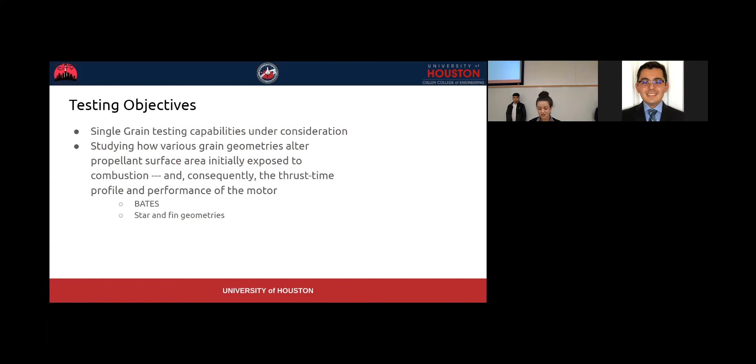A bit more about our testing objectives: we're thinking of testing single grain, though dual grain has been considered as well. Another objective is to test how different grain geometries might alter the thrust curve, looking at that thrust-time profile. Among the geometries we're considering are the BATES geometry, as well as playing around with different star or multi-fin geometries.

Our first group was materials, and the candidate materials we looked at included aluminum and two aluminum alloys, as well as stainless steel. We do have titanium on there as part of our decision matrix, just for the sake of completion and as a relative marker for how aluminum and stainless steel measure up. In the decision matrix on the next slide, titanium is there not as a true contender, but as a relative check.

As far as configuration went, we considered the two types of vertical - thrust pointing up or down - as well as horizontal. We think doing it vertical with thrust pointing down would be the safest and makes the most sense, mainly because if something were to go wrong, we mitigate the risk of projectile shards, and it would implant the motor into the ground if the structure were to fail. This configuration does have some drawbacks, mainly that it's an inaccurate representation of flight because gravity and thrust are going in the same direction.

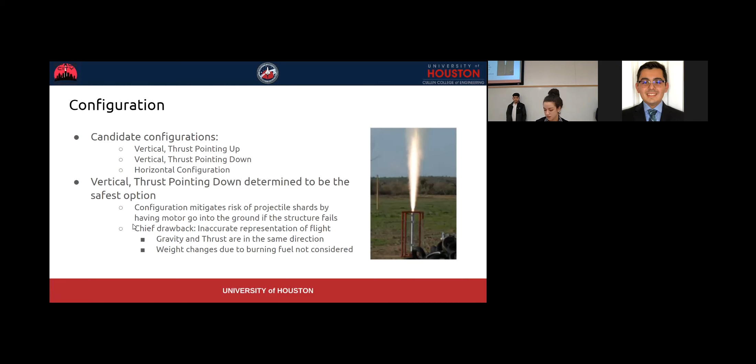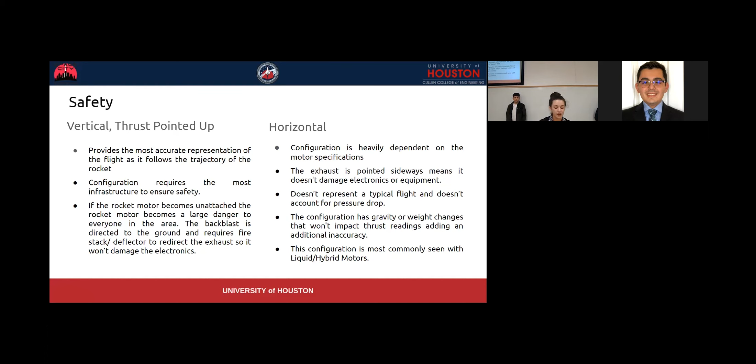Even though we think vertical thrust pointing down is better, here's a brief summary of the other two options. For horizontal, it's most commonly seen when we have liquid or hybrid motors. Since we're testing solid propellant here, we don't think it would be the best option. As far as vertical thrust pointed up, it would be the most accurate representation of flight, but the safety considerations are the trickiest, and we thought we could get rid of that by choosing vertical thrust pointed down.

As far as electronics, for the load cell we will be using the one we currently have in the lab, which is our 500-pound S-beam load cell. This works for two reasons: for up to K class motors, that should be enough, and budget-wise it's good to use equipment we already have.

These are different parts of the electronics as shown on the wiring diagram right here. This is also one we have left over from the capstone testing, rolling over to this one. Some things we're looking to change include that the old one uses an Arduino Mega, and we might be swapping that out for a Teensy.

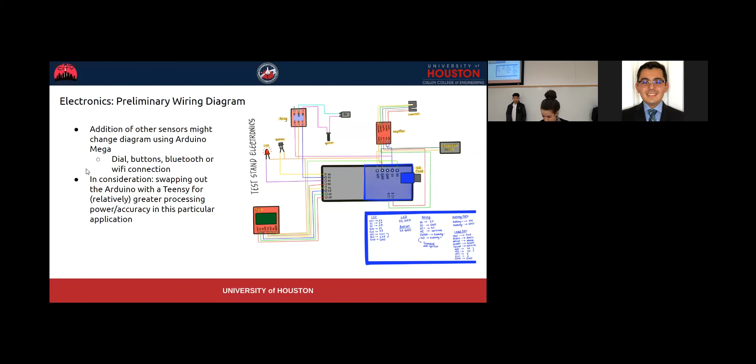As far as the electronic housing unit, we were thinking of having a single unit with all the electronics and wiring included, mounting it onto one of the rail frames. This is also up in the air right now - we're thinking of having it somewhere along the lower rail frame, but position has not been finalized. We were thinking of having something with different slots for wires that we can take apart and put back together relatively quickly.

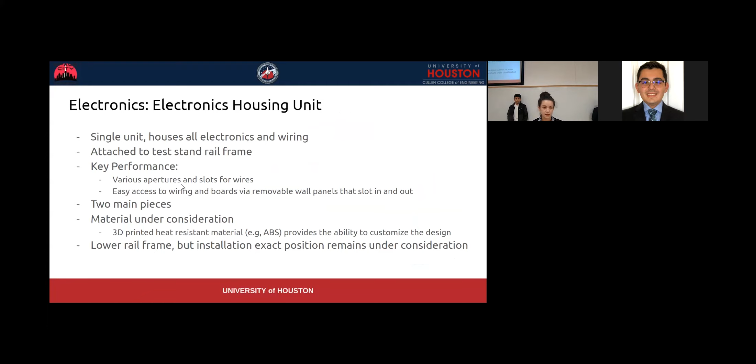And that was it for the solid propellant test. Avionics is split up for SRAD primarily into 4 different sections - you'll see these as we go through the slides. Our 4 different areas of focus would be a flight computer, a ground station, an SRAD sensors team to focus on what kind of sensors might be useful to further develop the rocket, as well as a telemetry team.

Here's a brief overview of the SRAD sensors. Basically, the idea is we'll be applying sensors throughout the rocket to determine areas to collect real-world data from that might allow us to further develop our rockets. A few examples will come up as we go through here, but ultimately the goal with this team is to further the development of rockets by having real-world data we've collected to determine our materials and strength of things as we move forward.

So one of the sensors we talked about was a thermal gradient sensor for the propulsion system. You can see on the right there's a bit of math that has been looked into for the thermal gradient. One of the first things we had to look at was thermocouples versus thermistors.

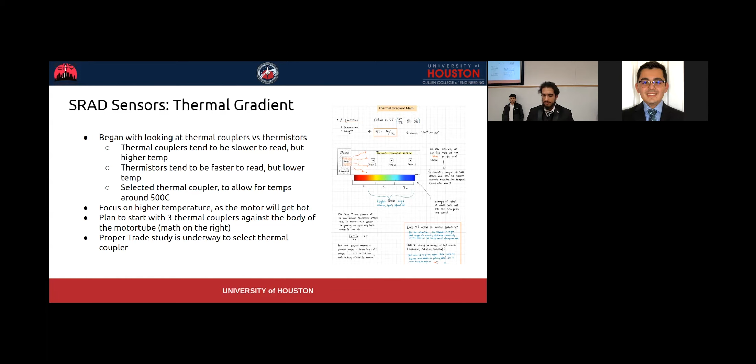We're going to have a trade study done a little bit after the PDR. We want to make sure we have enough time to properly look through all our options and decide what would make the most sense as far as thermocouples go. So it's something that had to be pushed beyond the PDR.

One of the other ones we talked about for structures would be strain gauges. We want to have strain gauges on the fins to read the real world forces that happen on the fins during launch. Some of the major things we want to do: we want to try for 2 per fin, which will be costly. For now, we want to stick to 1 per fin, but the ultimate goal would be 2 per fin. And we want to have them read in 2 directions, which is really important.

So we want to have both the downward force, so we can see how the actual forces pushing down on the rocket are as we launch, the drag forces, as well as how much the fins are flexing during flight, if there's any flex whatsoever. That'll give us some real world data we can work with and hopefully pass off to the analysis team to do more with.

Again with this, we have a trade study underway. Our criteria has been highlighted under vibration durability, high accuracy, force safety factor, and cost. We had bought some strain gauges before off Amazon, and they were very cheap and did not work out very well. This criteria was determined based off of that. Hopefully these will be a little bit better.

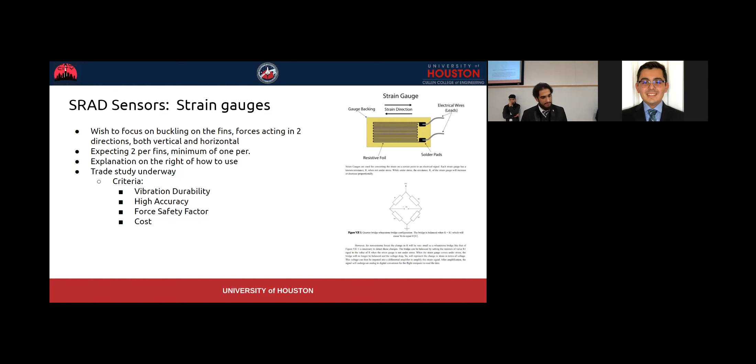You can see a picture of strain gauges on the right, as well as some information we have about them. So next we have the flight computers.

Some of the objectives we had for our flight computer: we want to measure atmospheric pressure, measure acceleration, and be able to trigger parachute deployments. This is a little bit tentative for SRAD. When we start off, we're not going to be able to trigger parachute deployments right off the bat. So it will be a long-term goal once we have a lot of testing done to ensure we're actually able to read and properly denote our states, which is very important.

Obtain gyroscopic readings, GPS tracking, log flight data onto an SD card, and transmit real-time data to the ground station, as well as receive commands from the ground station. We'll talk about all these a little bit more.

For the flight computer, predominantly for our main controller, we want to use the Teensy 4.1. The 4.1 is optimized for I/O. Out of all the Teensies, the architecture changes as the numbers go up, and the 4 architecture is really designed around being able to read information in and out really quickly. It's also coupled with quite a few I/O pins, so we found it to be the best for us.

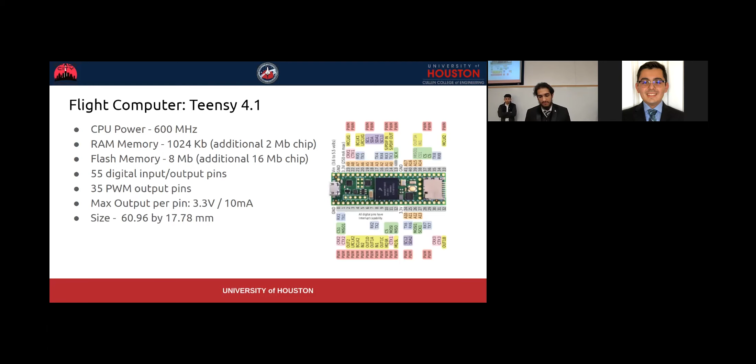For our barometer, we have a BMP390. This was last year. We had a list of options that we were able to use for our barometers that was given to us by our chief engineer. And we conducted a trade study, and we believe this one to be the best option, so that's how we came to this one.

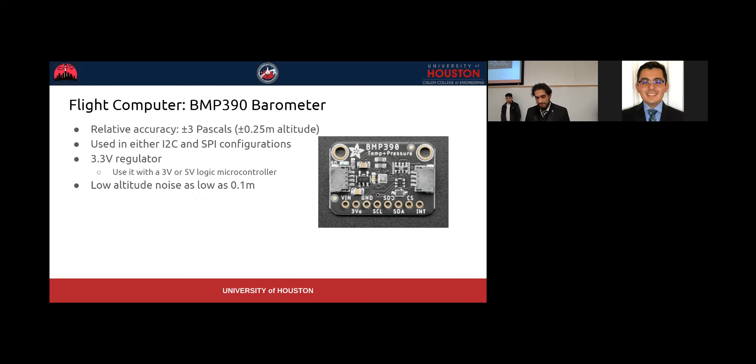Relative accuracy of about 3 pascals. We originally wanted to use I2C communication, but it's seeming like that might be a little bit too slow, so we're considering moving over to SPI. It's a built-in 3.3 volt regulator, and there's low altitude noise.

Then we have our accelerometer gyroscope, which is the LSM6DSO32, which is a whole mouthful.

You can see it's a fairly low power consumption, which is something that's really important to us, as we'll be running off a 9-volt battery. We want to make sure that we have optimal time, potentially 3.3 volt, 3.7 volt that we've been looking at.

This one also uses either SPI or I2C. It has an analog voltage supply of around 1.7 volts to 3.6 volts. It's able to read fairly well in our kind of tilts for acceleration, for gyroscopic data. Maximum acceleration works to about 34 gravities, and the standard data sampling rate is from 1.6 hertz to 6.7 kilohertz.

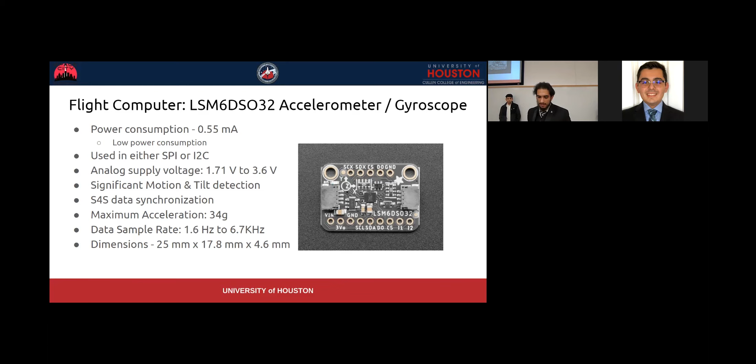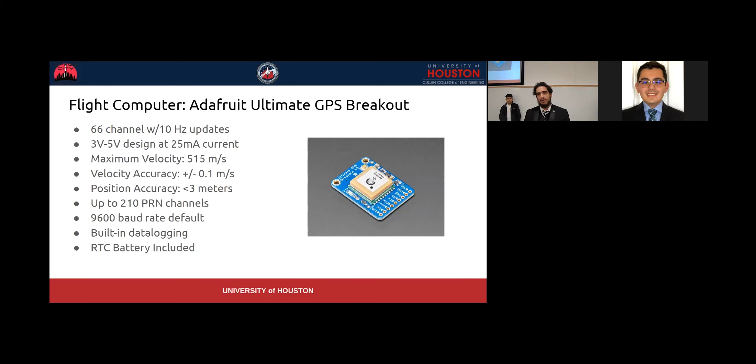Dimensions are there. So then we have the GPS breakout board. This one is going to be important for us to be able to get the last known location of the rocket, obviously. And this will just kind of give us a live read so we can find our rocket a lot easier when it's on the ground. You can see some information about it there.

We have the XBee here, which is kind of a little bit under our telemetry, but it will also go on the flight computer. You'll notice that all these parts are kind of all linked together to each other, so they kind of have some overlap.

So the XBee is our way of communicating via ham radio back over to the ground station that we will be hoping to develop this year. And that'll just kind of allow us to get some live read of the information and be able to control the rocket, do ground testing, things like that, just to ensure that everything is working correctly.

You can see there's receiving and transmitting on there, power draws. And you can see range is up to about 9 miles with a dipole antenna and 28 miles with a Yagi antenna. The frequency ranges are listed on there.

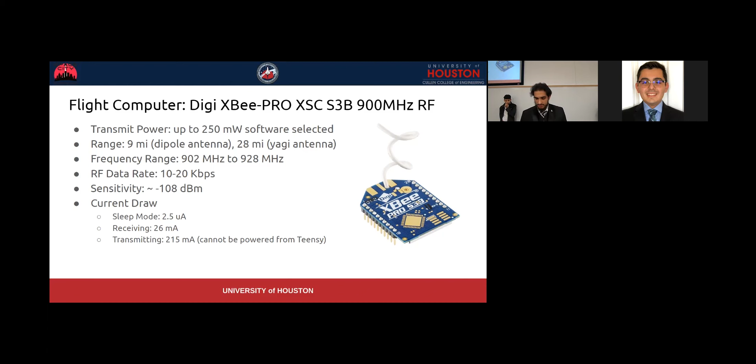So next we have the ground station. The ground station will allow us to view our information live as we're actually launching. The most useful information that we're hoping to get on here is the maximum altitude of our rocket. That way we can know what our apogee was very easily, as well as the last known location of the rocket.

Obviously, currently we have a COTS ground station that involves us carrying a laptop and a big antenna out in the middle of a field. And ideally, this station will be a lot slimmer and a lot smaller, so that way we don't have to carry out a laptop and this huge antenna, but instead this little small box in which it's all built into.

And we'll have a nice, easy to read screen because LCDs can be kind of hard to see in the sunlight. But a little bit more about that.

Here's the connection types trade study. So we talked about how we're going to hook up the XBee to which device that we want to use. So our options were we can hook it up to a Teensy, which is like a souped up Arduino for those of you who are unfamiliar.

We could do the XBee to a Raspberry Pi. And we could also do an XBee to a Teensy to a Pi. And ultimately, we found that an XBee to a Pi would be our best option because the Pi allows us to have the most expandability.

XBee to a Teensy to a Pi would allow us to reuse that code that we're using for the XBee to send data almost exactly to receive, but then processing it again in a Pi seemed like a little bit of an extra step. And the Teensy by itself, XBee to Teensy, is functionally cool, but ultimately we don't get as much power as we would with the Raspberry Pi. So we felt that that was not the option that we wanted to go with.

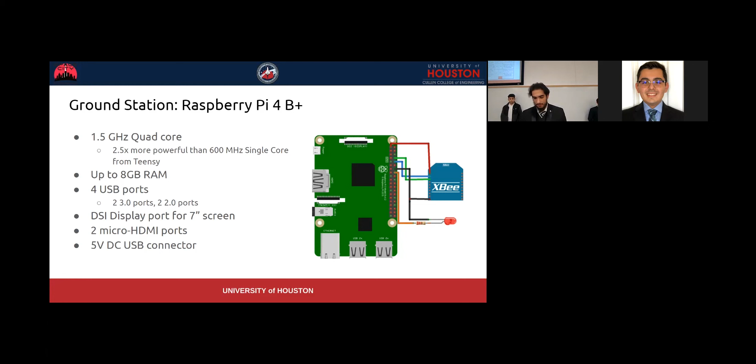Here's an OLED trade study. If you guys recall, I mentioned I wanted to have an OLED screen, so it's nice and easy to read in sunlight. Reading off a laptop or looking at your phone is functionally very hard and not very practical. OLEDs tend to be a lot easier to see in sunlight, and especially we want to go with the black and white OLED, so the contrast is really high, making it easy. This will allow us to much more easily get our data and find the location.

And plug in things into our phone, GPS coordinates and whatnot that we might need. You can see here we started with 3 different options from Adafruit, and we ended up liking the 128 by 64 OLED that was built for the Raspberry Pi. Ideally all of these would work on the Raspberry Pi, so we looked at them afterwards, but it seems to be the one in the middle there that I like the most.

So here's actually that OLED screen that we talked about. It's Raspberry Pi supported. Here's the dimensions, the weights. It has the joystick on the sides, which is going to be pretty cool. We're hoping that we can use that to switch between altitude and GPS location, and potentially other information should we add to the ground station later on.

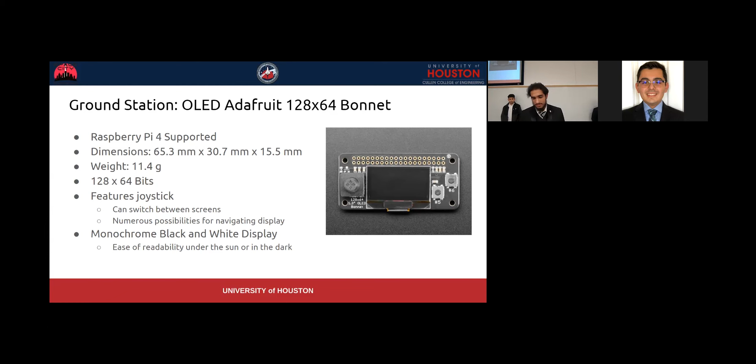It just gives us a nice way to hit the little arrow to move to the side and see a different screen, or scroll over if we need to see more for our coordinates, if we're getting more coordinates that we can put on the screen. And obviously monochrome black and white was an important thing. First of all, that brings down the price, as well as makes it easier to read in the sunlight, which are two things we wanted to make sure we had high focus on.

Here's an optional features trade study. At the beginning of the year, we had a talk with all of avionics, and I said, here's what we want to do this year. Is there any features you guys would like to add in that I've potentially not thought about? I kept it kind of to the 'this we need functionally to be a ground station' - we have to have a working way of having data sent back to us or reading it off the flight computer. These are some features that they wanted to add in, not necessarily required, but they thought would be a really cool thing to have.

You can see a 7-inch portable screen. They wanted to add a 3D render of the rocket. Obviously this is not a priority of ours, but this is something we want to add in on there, so that from our gyroscopic data we can create a 3D render locally, so you can see how the rocket is oriented in 3D space, as well as LED colors to showcase expected release.

If you guys recall, for the flight computer, we can't actually hook it up to any form of black powder or anything like that, because until we've gotten a lot of testing under our belt, we don't know that there's some random edge case we cannot account for. So these lights would denote for us when the flight computer believes it's reached apogee - it can send over a code to the ground station to turn on an LED. That way we can indicate where we expected apogee to be, as well as where we expected main to be, and compare that to our actual data collected on working flight computers we know will functionally work, to test for random edge cases we may not have considered before.

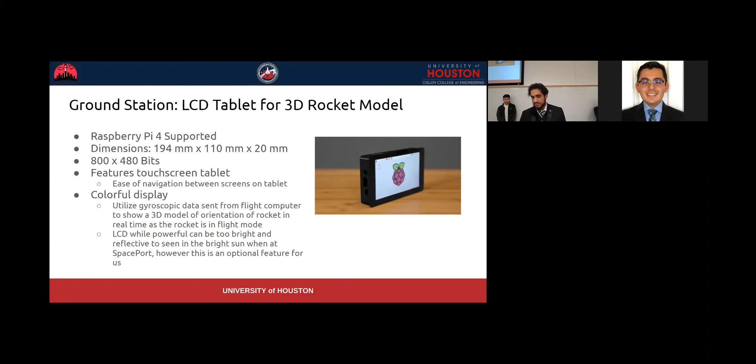It is LCD. We don't have too big of a priority on too much visibility here. It would be cool again, and it's one of those that you kind of expect not to be walking around in the middle of a field in New Mexico while actively looking at this. It would be during the launch time, so you'd actually have a little more visibility versus an OLED screen you'd be actively looking at while walking around the field. So I'd expect a little bit harder visibility there.

Here are some of the LED pins that we talked about earlier. So we were looking at 3.5 millimeter LEDs. Those are your standard LEDs that you get with almost any beginner electronics kit. Obviously through hole, no SMD.

It'll showcase 6 different states of the rocket, which you can see on there. So we have boost, fast, coast, drogue, main, and landed. I believe we're actually missing a pad - we actually talked about that earlier. We don't want to do pad just because we don't really need a denoted state for that, that should be kind of inherent.

So boost, fast, coast, drogue, and main, landed all came from our COTS system. Boost is obviously while the motor is being actively burned. Fast is during that initial state where it has high momentum, but the motor is not being burned. Coast is kind of that pickup as we are losing a lot of that speed. Drogue is the drogue release. And then main is obviously the main release, and then landed is what's on the ground.

We're hoping to be able to note each of these states so that we can further develop our flight computer. Obviously, having boost, fast, and coast is not completely necessary, but it allows us to know that our reads are as accurate as we can get. That way, if we have any errors with our drogue or our main, we can look back at that data and see, hey, that started beforehand or afterhand.

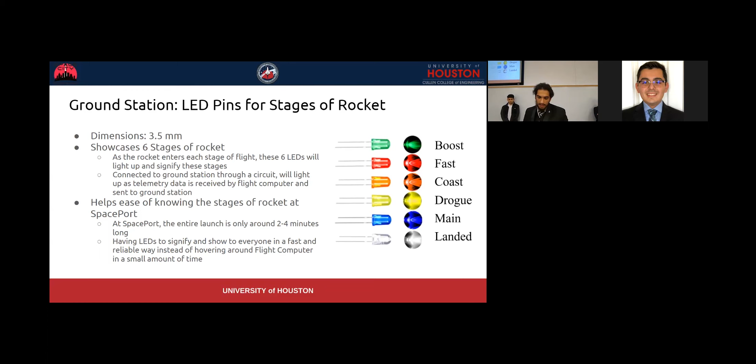So future plans - some of the things we want going forward: we want a way of setting off the black powder charges, something that is a physical switch you have to press and hold. For those of you familiar with our current ground station, there is a button you have to press to set off the e-matches, and you have a 10-second countdown during which you have to press another button in order to actually fire it, so that way you don't accidentally click a button and blow up someone's hand.

Same thing here. We want to have some way that you have to physically turn something on that can be electrically connected and disconnected, as well as a software means so that once that thing is physically connected, then you can go in and actually fire it.

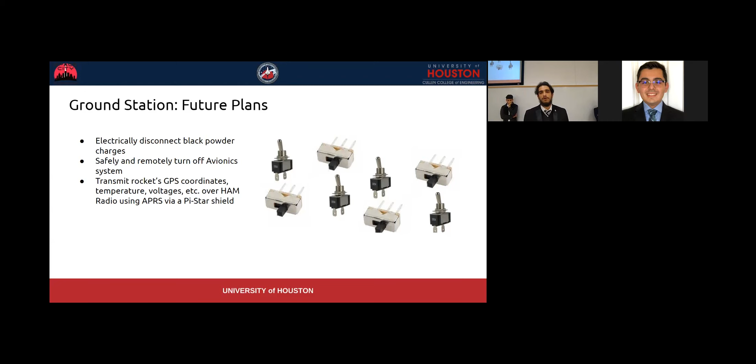And obviously we want to be able to transmit the rocket's GPS coordinates, temperatures, voltage, and other useful information over ham radio bands and be able to display them on our ground station.

Here is a kind of risk matrix that we have briefly built. Obviously, a lot of this has not been physically developed yet, as we're in the research stage for a lot of this right now, and we need more parts to move forward.

Unknown GPS coordinates, since we're beginning, will probably happen more often than we'd expect, so we put it under occasional. Obviously it's not our main flight computer, so hopefully it's not too bad, but we put it under critical just in case we can't see it, or in case we lose it from our main flight computer as well.

Seldom and catastrophic: uploading the wrong file. If we upload the wrong firmware or wrong code, that's a potential issue. It's very unlikely, since we plan to have the code finalized and tested before we upload anything, but if it does happen it can be pretty bad. Our main goal is collecting this information, so if we can't collect any, that would be very bad.

Improbable and catastrophic is damage from it being dropped. One of my sub-team members did that. Yes.

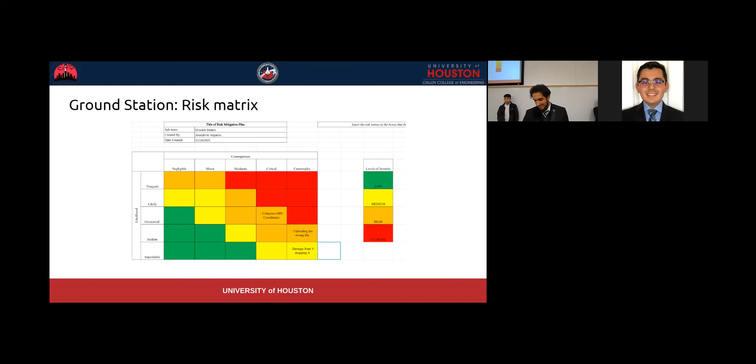Telemetry overview. Telemetry is another one of our systems. We want to optimize the way we send data over telemetry and radio waves from our flight computer to our ground station. We have an entire team dedicated to optimization and compressing this data as much as possible, so we can send as much information over the waves as we can, using as little power as needed, and ideally as short antennas as we have to that are still feasibly workable.

Especially at 30,000 feet, which we won't be flying with first, but for the long-term goals. Data will be collected at around 100 hertz, and we want to send it over at least at 1 hertz, ideally closer to 10 hertz.

This will be done over the XBee, as we talked about earlier, in the flight computer and the ground station. There will be XBees, both receiver and transceiver, one on the flight computer and the other on the ground station. We want to use a directional Yagi antenna built into our ground station that we can read from, attached directly to the XBee. Live information will ideally be displayed on the ground station from the flight computer, and also stored on the flight computer in an SD card for readout afterwards.

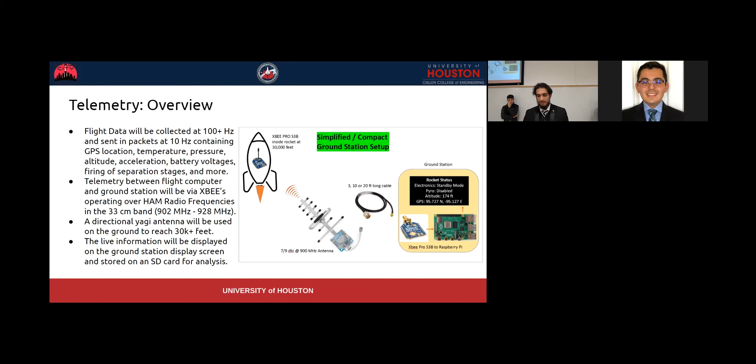And yeah, I think that should be it for me.

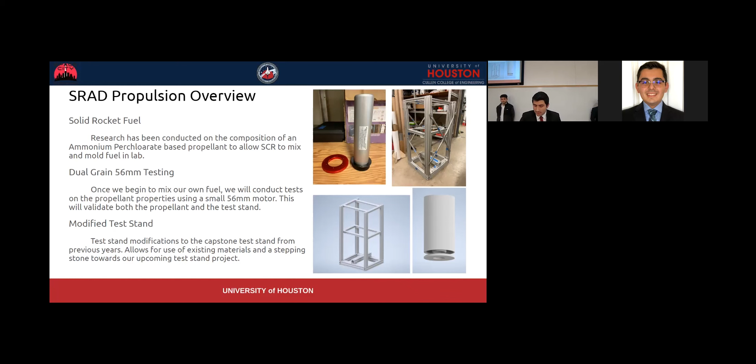So of course, one of the main advantages of having an SRAD Propulsion sub-team is the fact that we can actually work with all of our other sub-teams in Space City Rocketry. Here's a small list of some of the joint projects that we have worked on.

Really like to thank Avionics for helping out the Capstone team and us as well, for helping us develop the valve control system, specifically the electronics and the microcontroller. Of course, thanks to COTS Propulsion for really helping us get through the modifications for the previous Capstone test stand. They've been a great help, and they've helped us out for the past 2 months. So it's been awesome - data validation and testing.

We've worked with Ravi already in Analysis, but we're planning on working a lot more with them. So as they continue on their sub-team and their projects and get better with their analysis, we will then provide them with even more data to work together and really have a great foundation and great testing for all of these projects. And of course, haven't worked with them yet, but in the coming semesters, we're hoping to work with Structures for the manufacturing and development of pressure vessels for the oxidizer and helium tanks, as well as mounting those tanks to the airframes. So a lot of projects that we can work on with other sub-teams.

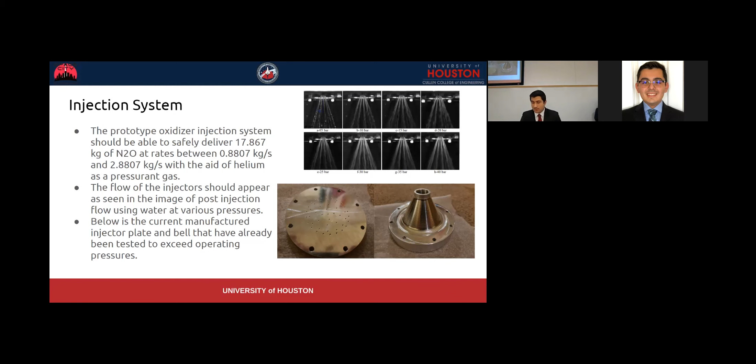We're at different pressures. Us, along with the capstone team, are looking to complete that testing before the end of the first week of December, so we can get some of those pictures on our own.

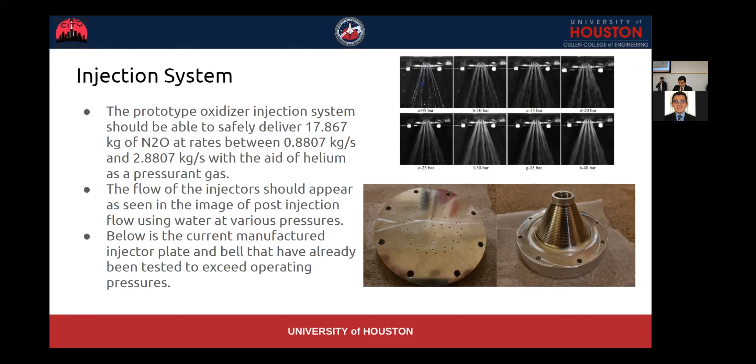And of course, they did provide us with a couple of decision matrices that they deemed viable. They have the geometry for the injector plate - several geometries: shower head, angled axial, and vortex - with their factors, weights, and totals according to those, as well as the material decision matrix for the materials of that hardware.

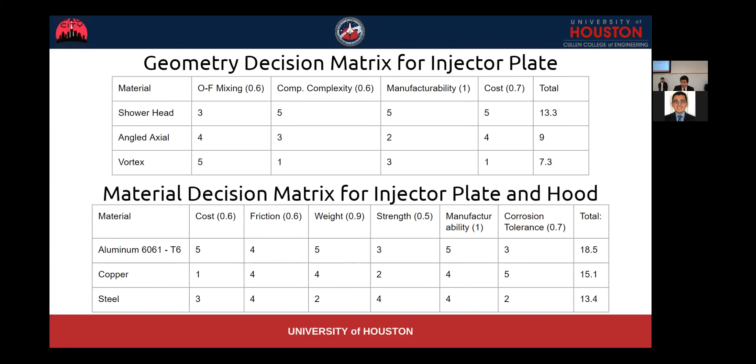All right, so flow control. It is very obvious that the majority of the effort into a hybrid motor system is the optimization of the flow of oxidizer into the combustion chamber. In order to reach the required 30K of altitude, along with the extra weight brought along with the hybrid engine, it is estimated that it would need about 17 kilograms of oxidizer, and it'll have to flow through that in about 9.5 seconds.

The valve control system is going to be very crucial for this hybrid motor. It is designed with multiple pressure transducers, as well as a motorized ball valve connected to an electronics microcontroller, and a flow rate sensor as well. The pressure transducers will not only measure the pressure in the combustion chamber and the oxidizer tank, but also reference the flow rate sensor to ensure that everything's optimized correctly.

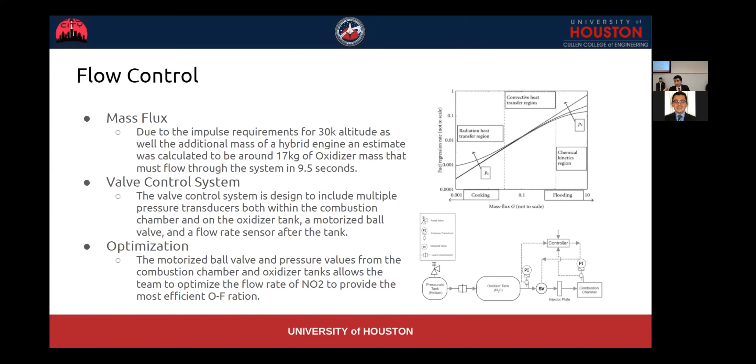Because of the optimization, it is crucial that we have a good oxidizer to fuel rate ratio. At the top, you can see what different mass flux does to the fuel regression in the solid portion of the hybrid engine.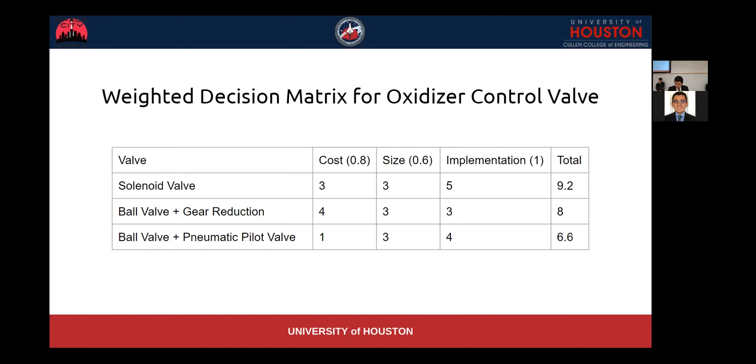All right, so pressure vessels. Although the pressure vessels were not in the scope of work of the capstone team, they did complete some research into the pressure vessels. After the capstone team has completed their testing and for their capstone deadline, it is on the Space City Rocketry team, specifically SRAD Propulsion, to develop these pressure vessels.

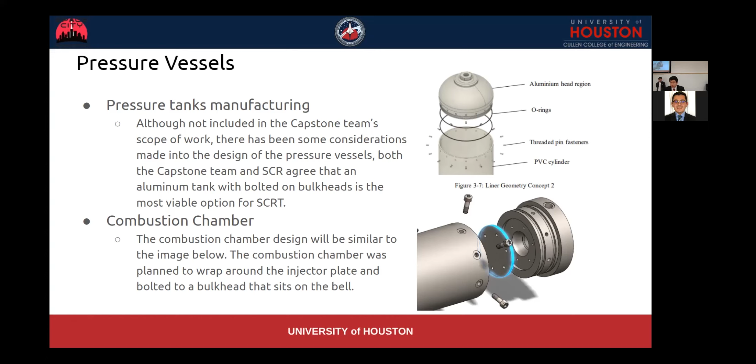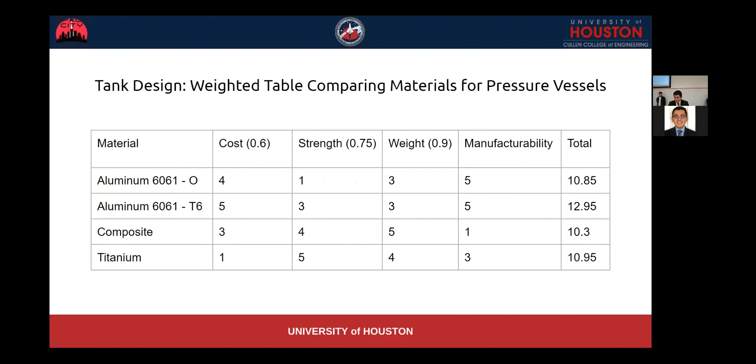So electronics and data - once again, them and SRAD Propulsion thank Avionics for their help. They worked together to come up with a decision to use a Teensy 4.1 to run the valve control system electronics. The controller will handle all types of data collection as well as the main valve control.

The code for the controller, they're still working on that. It is supposed to read all the sensors, adjust the flow rate accordingly, according to the solid fuel regression, and keep readings of the combustion chamber pressure.

Data collection is crucial, of course, because we are completing these tests and it's going to be a prototype hybrid rocket engine. We have to capture as much data as we can in order to optimize the motor so that it can continue to perform efficiently and at the right pressures, and so that we're not exceeding any of the safety factors.

And of course, the sensors - I did mention them. There are 2 pressure transducers, as well as a flow rate sensor and a motor with a main ball valve for the control.

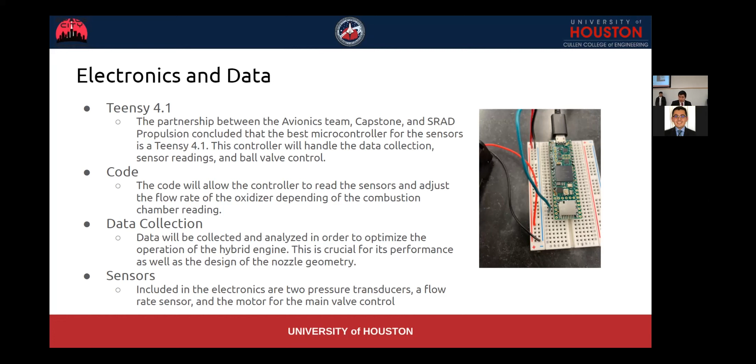Keep in mind that this project is a work in progress.

Since it's a work in progress, there's still a lot of work for us to complete. The Capstone team has basically laid a foundation for us to continue their research and continue developing this hybrid rocket engine. We will continue to develop this after their deadline, specifically with the other Space City Rocketry sub-teams.

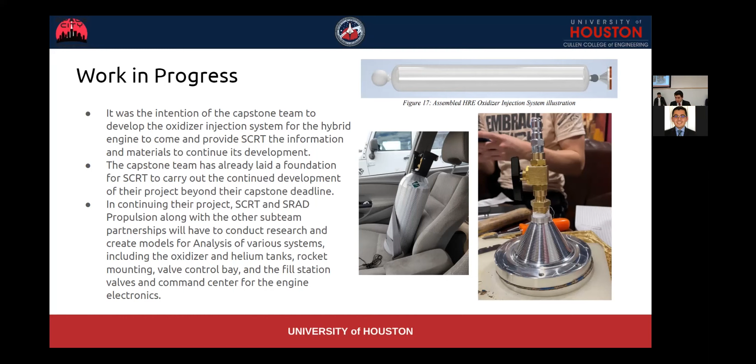For some insight on things we have to tackle in the coming semesters, we have to get with several sub-teams for development of the tanks, the mounting mechanisms for the hybrid rocket engine, the valve and command center - so the fill station valves and command center - and also the engine electronics. The tanks and the combustion chamber have to be connected together.

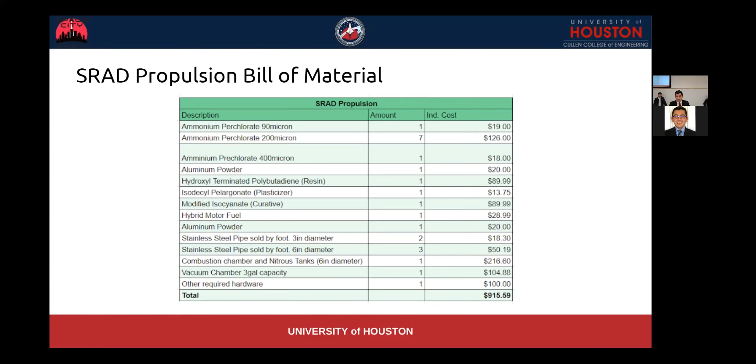One point about testing - we're in contact with the chemical safety department at UH, and we have planned, or will plan, a meeting with them to make sure everything we're doing is safe and done at the right location. Same with storage of everything - we'll have to talk with them to make sure everything is safe.

So some final points for today. I want to thank everyone who presented today and everyone who's here. As far as Space City Rocketry, this concludes everything we've presented for the last two days.

Zenith and SRAD are both ambitious. As Gustavo mentioned, this is the first time in 3 years we're building a rocket from scratch, and the SRAD projects are a lot more complicated than whatever we've done for COTS. There's still a lot of work that has to get done, specifically in the next month for Zenith. It's going to be hard, but one thing Gustavo and I are very sure of is that this is the time for us to pursue these projects and continue working on Zenith.

We have more members than we ever had before, and even better, we have members who are very ambitious and willing to work really hard. We're really confident that everything we're planning on doing will be done because we know we can work hard and we have the people to do the work.

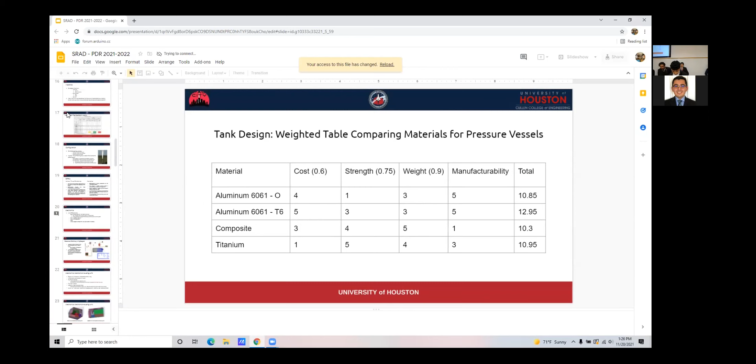What's not mentioned there was regular carbon steel. Carbon steel is dirt cheap. It does rust, but you can do plenty of things like grinding it down and adding a bit of spray paint, and that's no more rust you have to worry about ever again. Which is super cheap, and stainless steel is usually, at least on stuff I've worked with, much more expensive than carbon steel. So that's something worth looking into.

Prices on McMaster, I'm sure you guys have seen that, you can have a look. But I don't think you should rule out regular carbon steel — I think it's called low carbon steel, whatever McMaster calls it.

Also, just to help with the notes in general, you're talking about the location of something being the rail frame. I didn't really know what the proposed test stand would look like, so I wasn't sure what the rail frame was. Yeah, that was just a ballpark based on the capstone testing, so if it's going to be a similar shape it would be on the board. Okay, but yes, it is a little bit abstract.

If we put like a little arrow on the board or whatever, pointing to the rail frame area — I think it was in the report as individual size, but yeah. Okay, that's all I have for the solid propellant test stand.

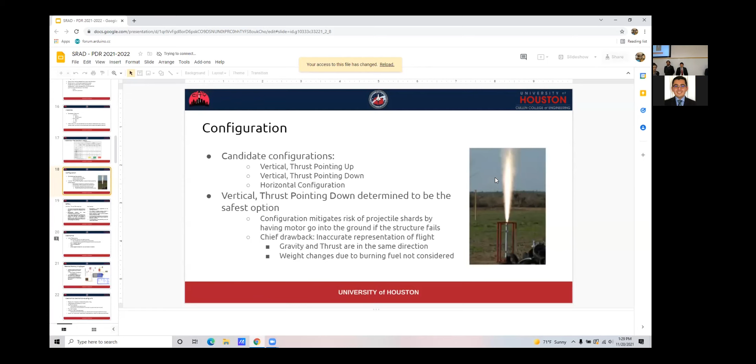On the decision matrix, you have the thermal properties of each material. I'm just curious how you think the exhaust gas will actually affect the test in such a way that it becomes a pretty significant factor for you guys.

I think this was before we decided on a specific configuration, just in case, because I know we were considering it as potentially horizontal. I think this came first and that's why it was sorted this way, so we might have gone about it a little differently. It's a good idea to think about all that, but...

If your motor burns for a maximum of 5 seconds and the frame isn't really in contact with the exhaust, then the thermal properties won't really matter there. So you maybe score that a bit lower in the decision matrix, and that will also help favor regular carbon steel as well — as I said, it's cheap, you can get it anywhere, and the only problem is rust. But it can also help make it easier to weld stuff instead of bolting it together, make it generally stronger, and then just add a thick coating to make sure.

And I guess this whole team just likes Teensies. Can I chime in on that one? Yeah, go for it, I understand why. But I don't know, yeah, I figure you would, but just to answer that real quick.

Obviously Arduinos are fully open source and they're really cool and functional, but the Teensy offers a lot more functionality and it's a lot more powerful. It's a little bit higher of a price point. It does have a proprietary bootloader, but ultimately, especially architecturally, they're very well optimized.

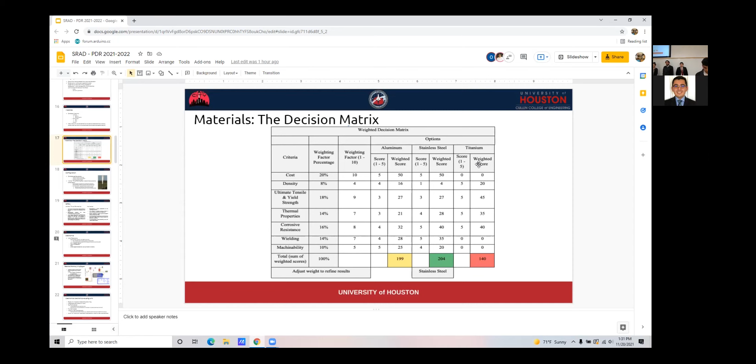Arduino has a lot of different branches, the Pro Nano, Micro, Uno, whatever. Teensy kind of has their focuses built on the version numbers, but each version is built to focus on a different area. For a lot of our work, we're working with IO, and we would like to have that power and speed that comes with the Teensy that's not quite the same on an Arduino. So yeah, just for anyone who's wondering why that is.

I know a ton of Adafruit sensors are compatible with Arduino and Raspberry Pis. Is it the same compatibility with Teensy as well? Yes. As my professor likes to say, C code will run on anything, you just have to compile it for that environment. So if you compile it for Teensy, the sensors will run on Teensy, and generally better than they do on Arduino. Also, keep in mind that the valve control for the hybrid motor, that electronic was chosen as quickly as possible as per the requirements for the capstone team.

They really didn't have too much time to look into a decision matrix. They just wanted something that was powerful, overpowered basically for what they needed, just so they could start working on it. I need to add a bit more: it's a direct analog read from the pressure sensor they're reading right there. So all you need is something that has a quick analog reader, and Teensy was perfect for that.

That's all for avionics. Okay. But I'm not sure. Yeah.

So for the ground station for avionics, do you plan on getting local information, like local environmental information? That's not something we're looking to collect. If you mean like humidity or something like that, that's not something we're looking at collecting right now. Is that something you think we should consider?

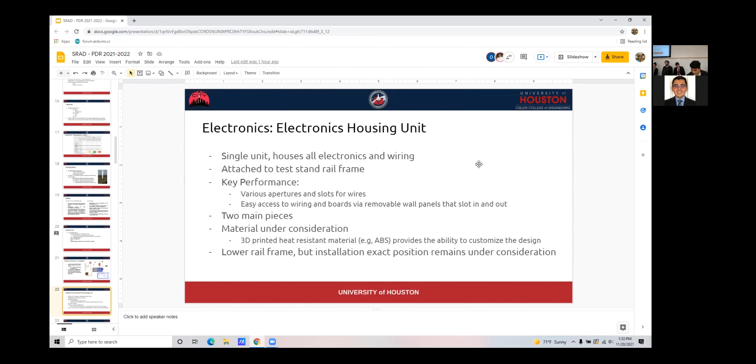Oh, wind speeds, yes, that's a good one. I remember it stuck with me when I was in New Mexico. I saw some team set up a little weather station. They put up a pole, had like the directional thing to see, and a little anemometer. Yeah, the rooster with an arrow. They had the equivalent of a big gun case thing that opened up on a little stand, and they had all the readings of temperature, humidity, because all those things get put into your RockSim or OpenRocket, and you can drag it on locally, not just checking weather on your iPhone.

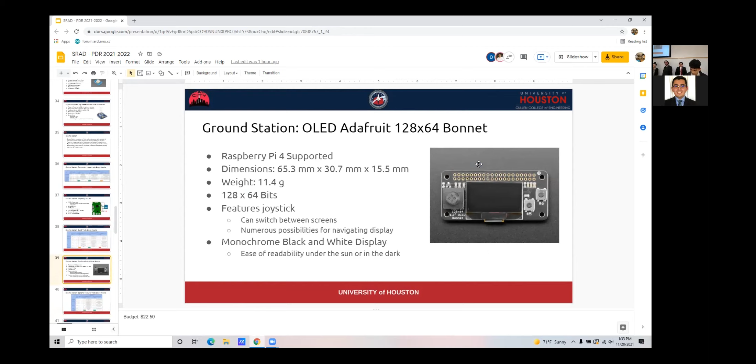One thing we wanted to do with our flight computer that we can also implement into the ground station - this was kind of a long-term goal, which is why we didn't put too much about it here - is the way we want to connect our SRAD sensors to our flight computer. We want a multiplexer, so we have a way of hot-swapping components. We can say, I want to do one launch using strain gauges, but I don't want the strain gauges to be part of the flight computer permanently. I do want the flight computer to be able to collect that data. Then on another launch, I don't want to use strain gauges at all, I want to use exclusively thermocouples.

Maybe we can do something like that on the ground station too, so we can say for this case we want to measure X, Y, and Z, but at another case we want to measure A, B, and C instead, and plug those in as well. Then it's just a matter of changing around a few libraries.

And for the ground station, I had a question about weight. I think you said it would be fairly lightweight. Yeah, sometimes multiple things, something to carry in your hand and then possibly another thing. I'm not sure if I'm getting confused.

I'm a little lost there at the end. Are you asking if there's two devices? Correct, yeah, that's what you're talking about. One device. The ground station will be one device for our build system here.

As for the weight, we don't have all the components in yet, so we can't give an accurate weight. But keeping in mind, looking online at those weights compared to my laptop, we're looking at something that's currently about 3/4 the weight of my laptop. And keep in mind that's with the antenna and everything, we'd also have to carry an antenna and a dongle and all these other things with us.

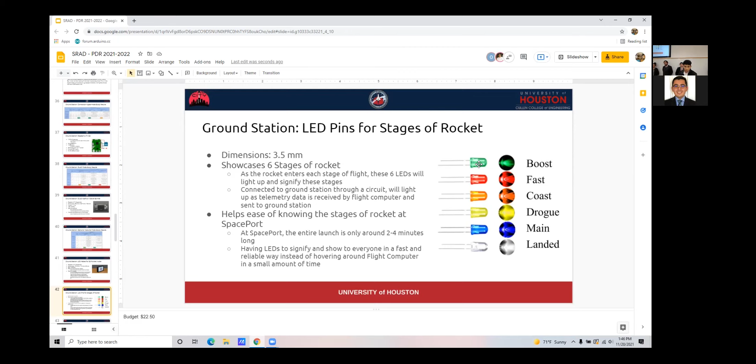Also, you guys have custom PCBs, that's on your budget? Yeah, we have $150 listed there to be able to do PCB design. And is that for flight computer or for everything? It's going to be mainly for flight computer.

I mean obviously we're going to have probably more money going forward for ground station and things like that. But flight computer will encompass telemetry as well as SRAD sensors. And then ground station will obviously encompass telemetry as well. So that will constrain the design or size wise, yeah.

And last thing for avionics, we see thermocouples in there, some stuff, maybe else I thought about earlier, but I can't think about now.

But I think you should try to talk to the engineering lab professors. I know, for example, Dr. Love, the one of those thermal fluids along with thermal, she runs the fluids lab, and she has like a spool, actual spool of thermocouple wire. And she's been sitting there for like I don't know how many years. And she only needs like 3 a semester or whatever, or 10 a semester. And all of them may not be expensive. That's something they could possibly ask for. Get her information my way, that'd be amazing.

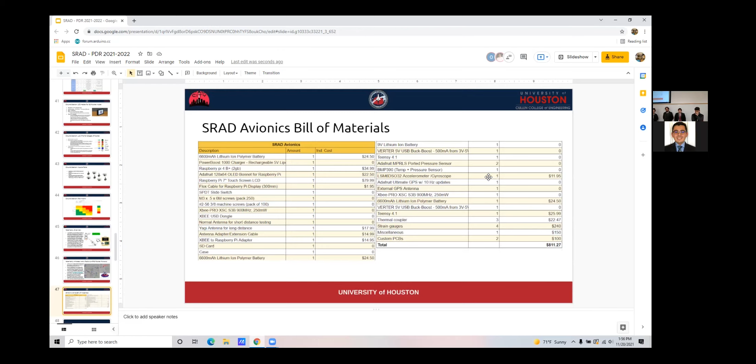I think it's important to consider, especially whenever we start making pressure vessels, to get a good organization or manufacturer for that. I think we already have a couple sponsors who will help us with that. But I know whenever I was talking to one of the guys from the Rice team, they also mentioned working together to create some of those, because they have a lot more machines, a much bigger lab, and they've already had several hybrid motor tests. So we were going back and forth talking about helping each other out to complete this project.

So was the design made in-house? Yes, that was actually made using, what's it called, the fluid analysis, CFD. So they actually did a lot of that testing on their own, and then they made and machined it.

Are you always using Ansys, or what are you using for CFD? I believe... man, I can't think of it. I'd have to ask them and get back to you.

And then another question, I see that you tested the injector, right? Or water flowed it. How did it perform compared to your operations?

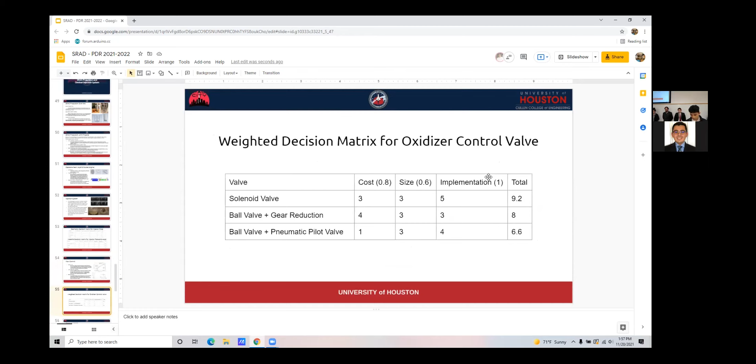So of course, the injector was tested without a gasket first. Obviously it leaked, but I gave them the idea of using just a cork gasket, something inexpensive. It was like $8 at AutoZone. The way we made it, we literally just put a piece on it, cut it with an X-Acto knife, put it on there, and it actually held up significant pressure. Up to 2 times the amount of operating pressure needed. No leaks. The injector's running perfectly fine.

So that was with pressurized water, using a pressure washer. That was a preliminary test, but they did purchase a CO2 tank, which they want to test with it, something closer to what nitrous would be like.

Was the amount of water that fell in the bucket the amount of weight you still expected for the flow? I wasn't there for that test actually, I was just shown what they did. But I assume so, they haven't told me otherwise, and they're still going forward with the project. We're probably going to test that even after the Capstone team's done.

I guess you mentioned money, that's obviously a big issue, a big setback, but what are some other technical issues or setbacks you're facing? So most of the technical stuff has to do with the fact that this is our first time doing a hybrid motor, or engine, I keep saying motor, but engine, you guys get it.

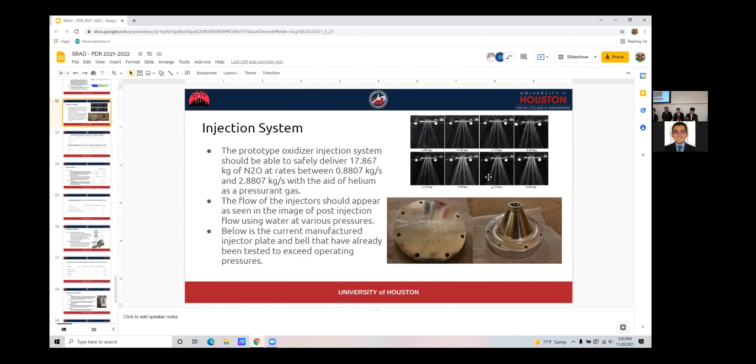I mentioned that because what would that cost look like? Cost difference. So the cost is - yeah, I made a sugar motor, I went to HEB and Home Depot and made a motor. Yeah, exactly, you're perfectly right.

I'd recommend you revisit the sugar thing. When you buy a pound, buy a kilogram, buy 5 pounds - you can't buy half a pound unless you're going to some crazy box store with tiny Ziploc baggies, self-serve style. Now that exists, if not, let me know, we'll make one. But again, you can buy 5 pounds of sugar for $1.50, stuff for $5. That actually sounds like a good idea, and you can start really, really small.